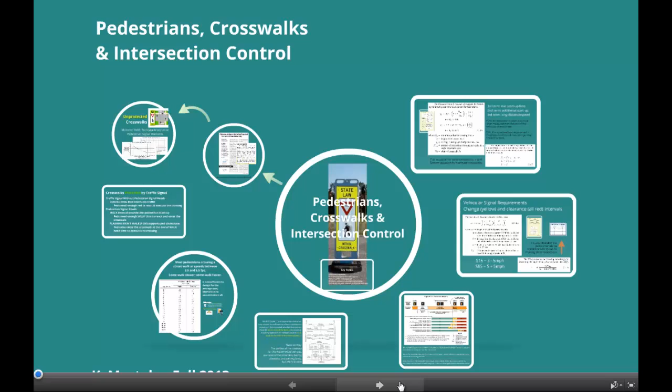The topic is pedestrians, crosswalks, and intersection control. We begin by recognizing that the street crossing experience comes down to the behavior of the pedestrian, the behavior of conflicting motorists and cyclists, plus the design of the intersection or crossing.

The conflicting behavior of interest is whether motorists and cyclists yield for pedestrians. The behavior is influenced by a variety of factors, including the speed of travel. A motorist traveling at a slower rate of speed has more time to see, react, and stop for a pedestrian than someone who is traveling faster. The number of pedestrians may also influence yielding behavior. High volumes of pedestrians tend to raise motorist awareness of the likelihood of a pedestrian crossing the street.

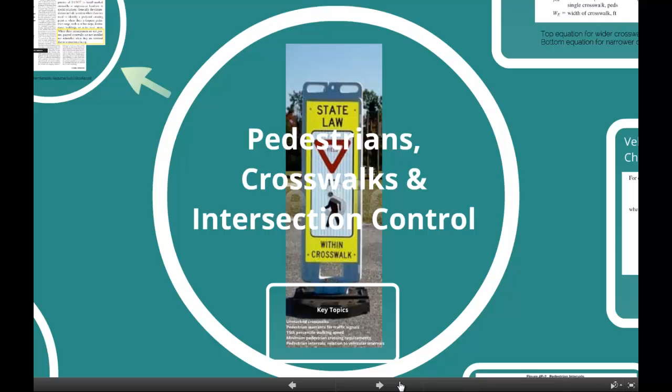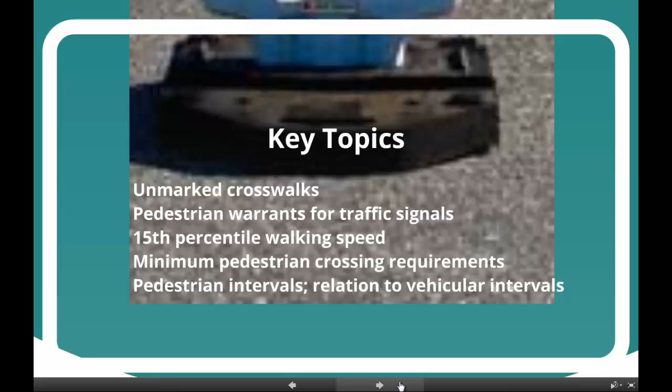In this presentation, we focus on accommodating pedestrians at intersections, plus current practices concerning crosswalks and related intersection controls. Key topics include unmarked crosswalks, pedestrian warrants for traffic signals, 15th percentile walking speed, minimum pedestrian crossing requirements, and pedestrian signal intervals, particularly how they relate to vehicular intervals.

In 2000, Thomas Jones and Patrick Tomcheck were motivated to study pedestrian accidents in marked and unmarked crosswalks. It had been the practice of the Los Angeles Department of Transportation to be selective regarding the reinstallation of marked crosswalks at unprotected locations. When removed due to resurfacing, painted crosswalks were not automatically reinstalled. By removing marked crosswalks at locations where they were not deemed appropriate, LADOT was seeking to reduce pedestrian-related accidents.

However, citizens and the media challenged the practice of selective versus automatic reinstallation, saying it created an unfriendly pedestrian environment. What do you imagine they found when they evaluated unprotected crosswalks and compared accidents in marked crosswalks versus accidents in unmarked crosswalks? First, let's take a moment to review the basic concepts that frame the issue.

The term unprotected refers to a legal crossing at an intersection where neither stop sign nor traffic signal is placed to control conflicting vehicles. The LADOT had been following the policies of the State of California Traffic Manual, which states, crosswalk markings serve primarily to guide pedestrians into the proper path and should not be used indiscriminately.

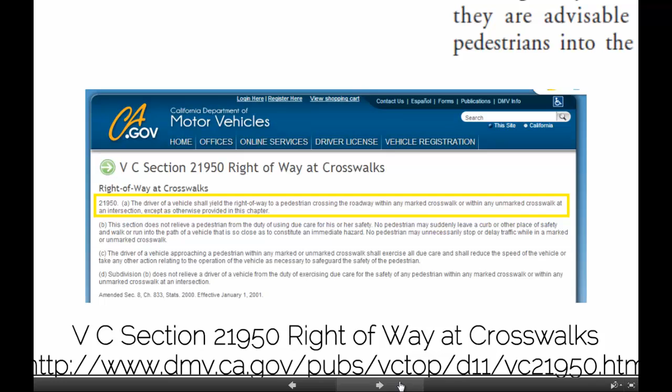Does it surprise you to learn that Jones and Tomcheck found that crosswalk removal was associated with a decrease in pedestrian accidents? Do marked crosswalks tend to give pedestrians an impression of personal protection, one that potentially lessens their sense of responsibility for a safe crossing?

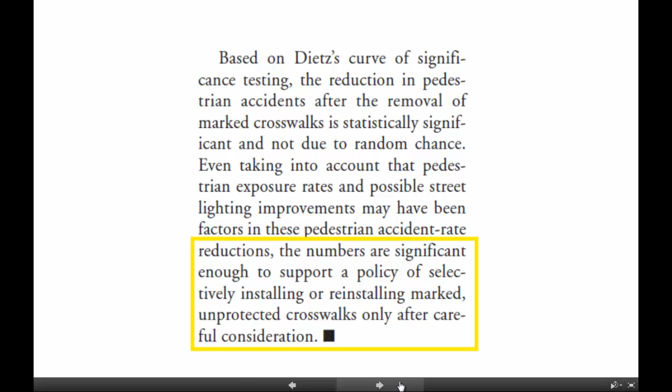Jones and Tomcheck found the association to be significant enough to support the continued policy of selective reinstallation of marked crosswalks at unprotected locations. Special circumstances for marking crosswalks at unprotected locations include locations with frequent pedestrian usage, such as transit stops, institutional buildings, and active retail areas.

At unprotected crosswalks, motorists yield, or pedestrians wait for an acceptable gap. If pedestrian and vehicular volumes are high, such that vehicle-pedestrian conflicts are frequent and difficult to avoid, signals may be warranted. The pedestrian warrant for a traffic signal is met when 4 hourly plots fall over the line in Figure 4C-5, or when any 1 hourly plot falls over the line in Figure 4C-7. The 1 hour warrant in Figure 4C-7 features higher threshold criteria, but requires that fewer hours plot above.

When a signal is justified at an intersection by this warrant only, it will be actuated with pedestrian push buttons and pedestrian signal heads. If the intersection meets this warrant, but also meets other vehicular warrants, pedestrian push buttons would be installed unless the vehicular signal timing safely accommodates pedestrians in every signal cycle.

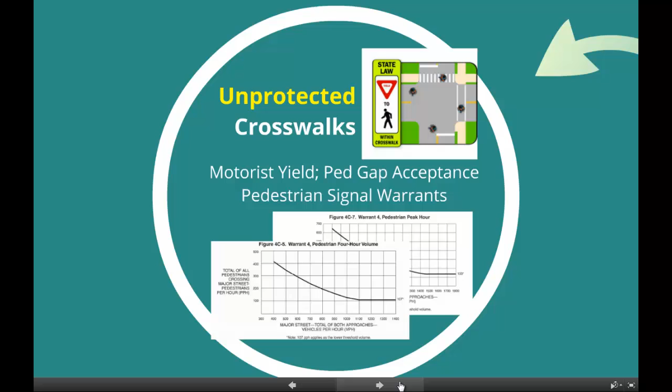A traffic signal without pedestrian signal heads cannot accommodate pedestrians unless the signal is set to interrupt conflicting traffic for a sufficiently long period of time. A pedestrian or group of pedestrians needs enough red time imposed on conflicting vehicles for the pedestrians to recognize and respond to their opportunity to enter the crosswalk, plus time to execute the crossing.

Pedestrian signal heads provide a separate indication for the startup time, that's the walk interval. The length of the walk interval depends on perception reaction time, plus the number of peds and the width of the crosswalk. The flashing "Don't Walk" supports the pedestrian clearance time. Peds who enter the crosswalk at the end of the walk interval need time to execute the crossing.

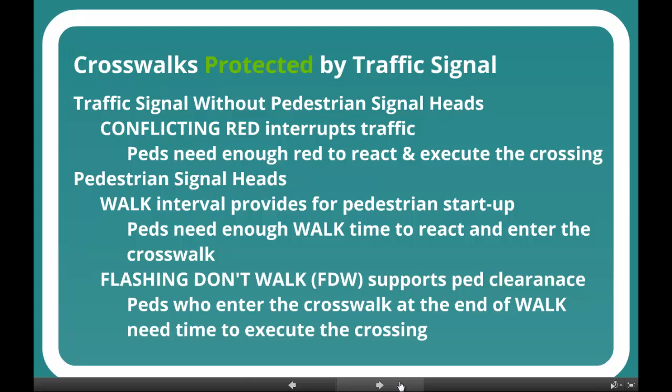The length of the flashing "Don't Walk" depends on the crossing distance, the walking speed, and local policy as to when pedestrians are permitted to be in the crosswalk. Some jurisdictions do not want pedestrians in the intersection during the vehicular yellow and/or vehicular all red. We will examine the implications of such restrictions in a moment. First, let's focus on walking speed and crossing distance.

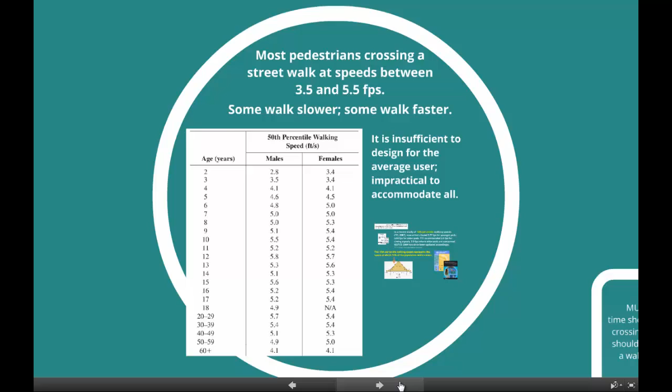Here we take a look at walking speed and find that most pedestrians walk at a speed between 3.5 and 5.5 feet per second. While it is helpful to know the 50th percentile speeds as shown in this table, we ought to recognize that it is insufficient to design for the 50th percentile average user.

Assumptions about pedestrian walking speeds continue to evolve with more current research and more explicit guidelines. We find that in 2004, John LaPlante and Thomas Kaiser were critical of the usual normal 4.0 feet per second design speed for the pedestrian clearance interval. They reported that the consequence of the 4.0 design walking speed was that as many as half of the pedestrians who began to cross at the start of the clearance interval may not have successfully cleared the travelway by the time conflicting traffic was released into the intersection.

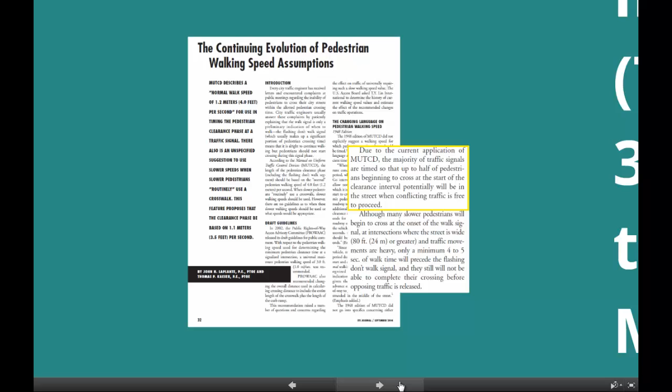A related study of 15th percentile walking speeds was conducted by the Texas Transportation Institute, or TTI. The 15th percentile speed represents the speed at which 15% of the population walks slower, approximately 1 standard deviation to the left of the mean walking speed. TTI found that the 15th percentile walking speed was 3.77 feet per second for younger peds and 3.03 feet per

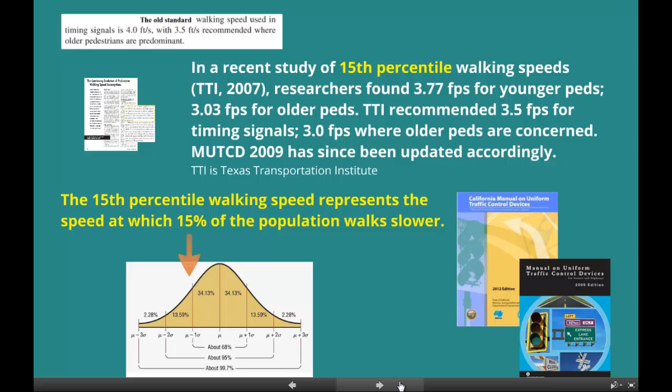second for older peds. TTI joined other researchers and recommended that the design speed for the pedestrian clearance interval be 3.5 feet per second for the general population and 3.0 where older peds are concerned. These reductions are reflected in the most recent editions of the MUTCD and the California MUTCD.

Walking speed goes hand in hand with crossing distance when computing the pedestrian clearance time. The MUTCD says that the clearance time should be sufficient to allow a pedestrian who left the curb or shoulder at the end of walk to travel at a walking speed of 3.5 feet per second to at least the far side of the traveled way. Two things to note: the end of walk, not the beginning, and to at least the far side of the traveled way, and not necessarily to the opposite curb or shoulder.

What is the traveled way? The traveled way is the portion of the roadway for the movement of vehicles, exclusive of shoulders, berms, sidewalks, and parking lanes. Let's take a look.

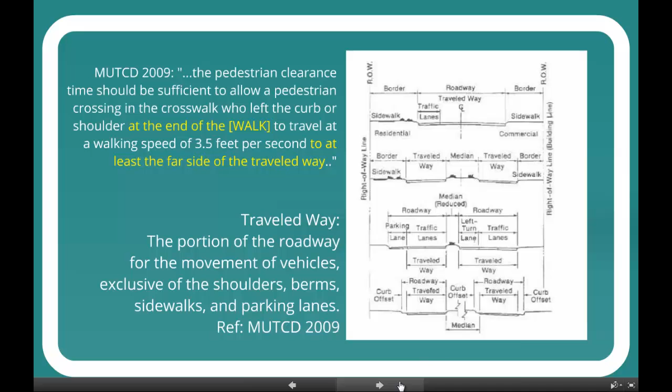As with pedestrian signal timing, vehicle signal timing also features change and clearance intervals. For vehicles, the change interval is the yellow and the clearance interval is the all red. The change or yellow interval is set to allow a vehicle within one safe stopping distance when the green ends to continue and enter the intersection legally. The clearance or all red interval is set to allow a vehicle who has entered legally on yellow to clear its rear bumper from the travel lanes or crosswalks before conflicting movements are released.

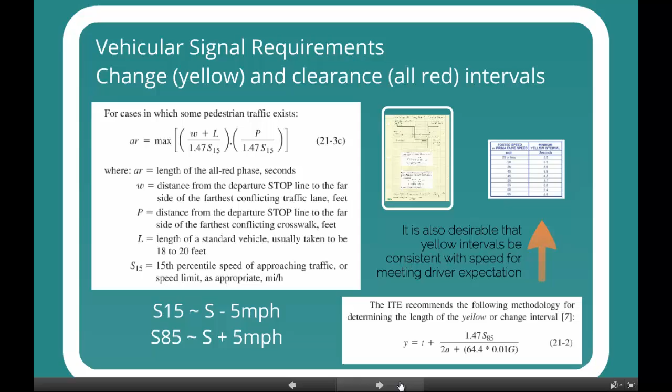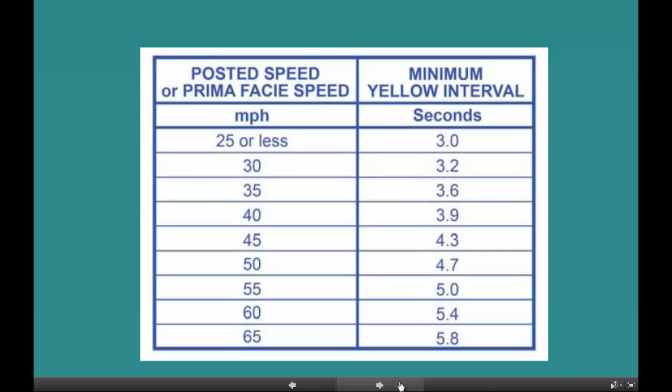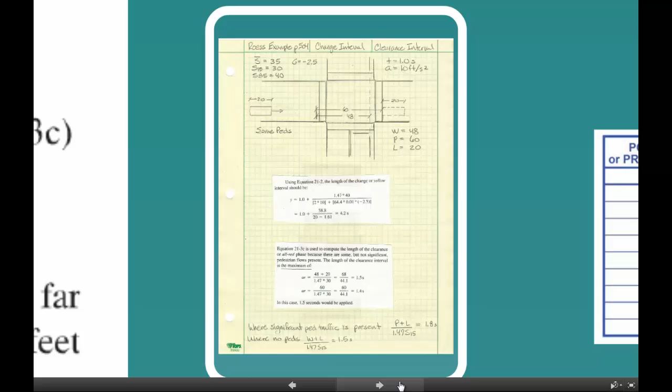Longer yellows are typically associated with higher speeds. Consistent use sets driver expectations. Thus, it is important that yellows remain consistent with driver expectation. This example from the textbook is an application of equation 21.2 and 21.3 for selection of suitable yellow and all red intervals. Pause and take a moment to study the diagram for the width of the intersection as far as pedestrians are concerned, and the other parameters specified here.